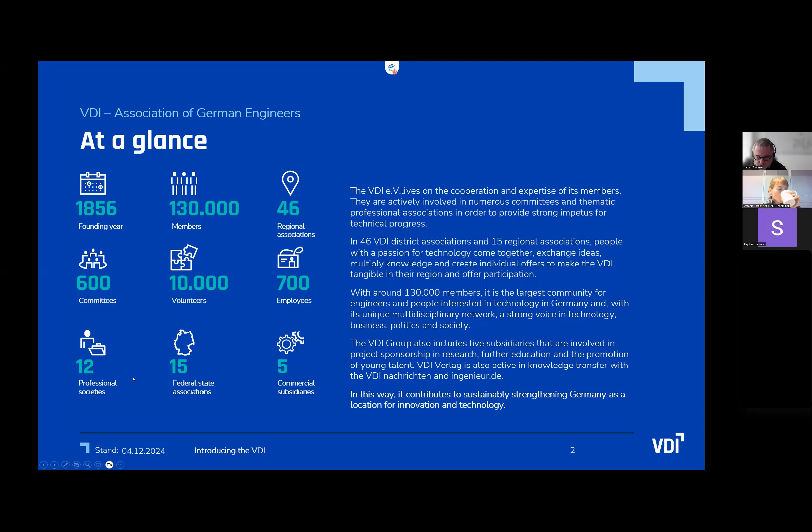First, I want to present some facts about the VDI. We were founded in 1856, have 130,000 members, and 10,000 volunteers work in our standardization committees. We have 600 committees, 12 professional societies, and 46 regional associations.

The main topic today is standardization, as the VDI sets technical standards. We have over 600 committees that develop recommendations for action and other publications such as studies. The main product is the VDI standards, with international recognition, and we also organize expert forums and workshops with our 10,000 voluntary experts. At the moment the VDI has 2,200 applicable standards.

Now I start with my main topic about the standard for thermal energy storage. The focus is on VDI 4657 Part 2, Planning and Integration of Energy Storage Systems in Building Energy Systems, covering thermal energy storage. The draft of the standard will be published in January 2025.

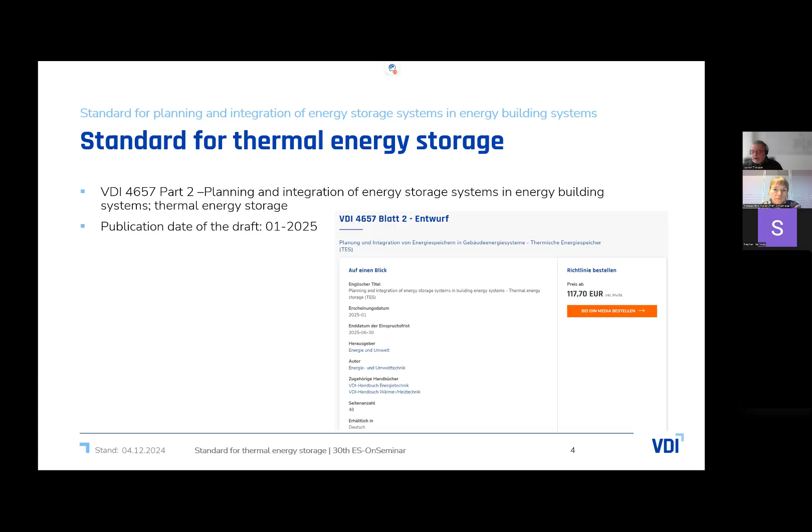But we already get the first questions about the standard before it is published. Therefore, I will explain the scope of the standard. It is intended as an aid for manufacturers and building services planners for the dimensioning of storage tanks for sensible and latent heat. In addition, the hydraulic system integration of thermal energy storage systems of different designs and usage requirements in buildings is described in the standard.

There are some typical applications. First, the storage of heating and cooling energy to decouple generation and demand, for bridging breaks in the supply or consumption of energy, and energy management when using several heat and cooling generators.

These are also elements of the future, very flexible requirements of energy systems, especially building energy systems. It shifts loads - hourly, daily, or seasonal loads - for energy management to increase the building's own use of electricity or for grid-reactive control. The last typical application is to reduce the cycle frequency and increase the running time during a cycle of heat and cooling generators in the case of only partial load.

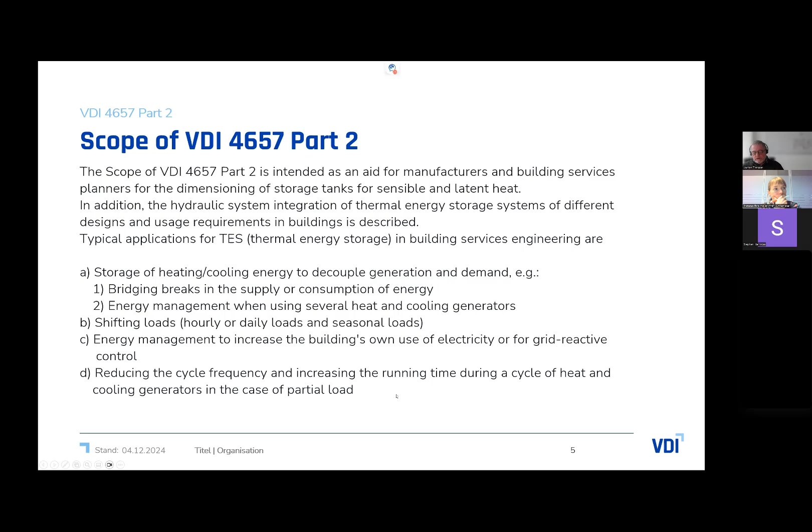We have a series of 4657 standards, and the thermal storage standard is Part 2. Part 1 is under development and we expect publication in 2026 - it's the basic standard about design and integration of energy storages in buildings.

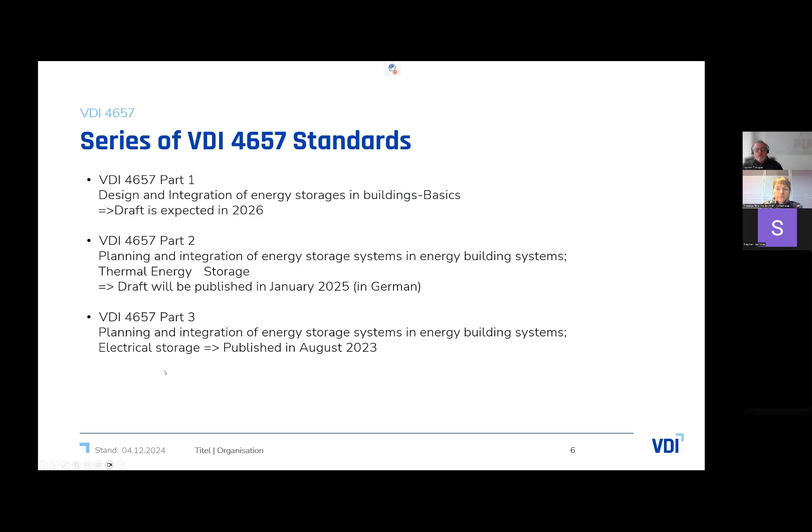Part 3 was published in August 2023, with the focus on electrical storage applications. But now we speak about thermal energy storage.

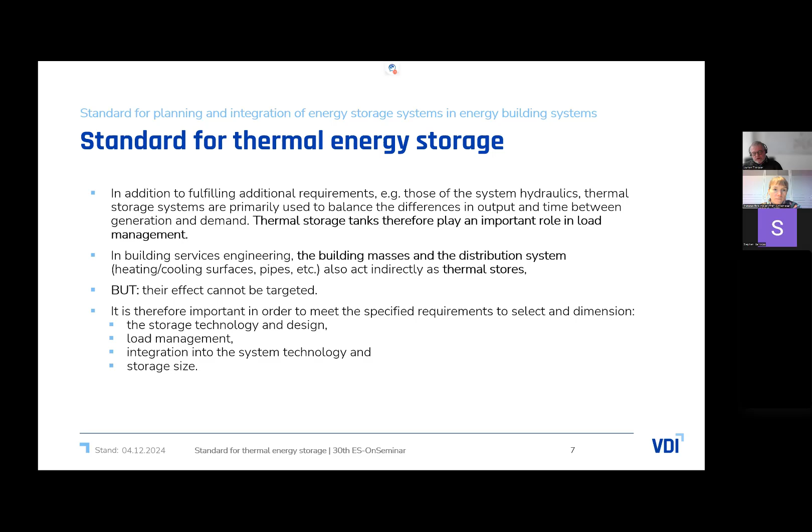Therefore it is important, in order to meet the specified requirements for selecting and dimensioning energy storage systems in a specific building, to choose the storage technology and design correctly, to organize the right load management, to integrate the system technology properly, and the storage size is also very important.

All these points were the motivation for developing VDI 4657, to describe the planning process so that selection and dimensioning of storage tanks for sensible and latent heat can be carried out. Heating and cooling applications were considered equally in this standard.

This means the selection logic moves away from liters of water content to kilowatt hours of heat content - the energy of the heat content, not the liters - because only the heat content is important when selecting a storage tank. In this way, storage tanks for sensible and latent heat can be selected equally, and the selection is determined by the boundary conditions of the application.

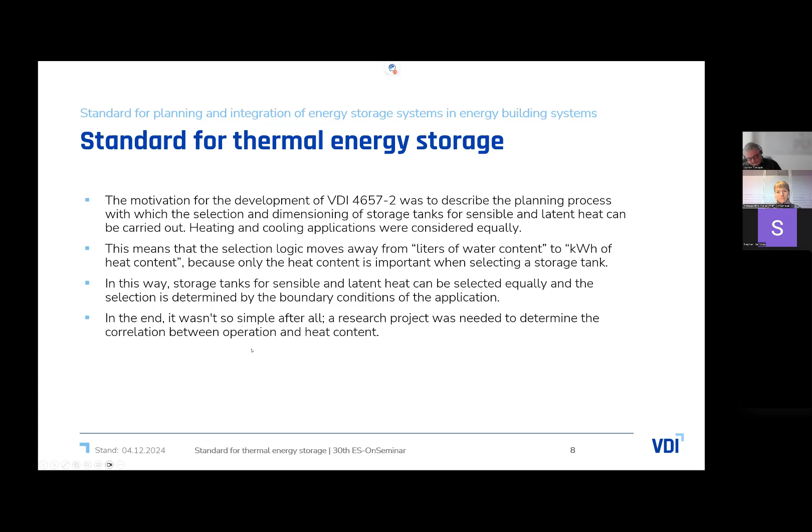In the end, it wasn't so simple after all. A research project was needed to determine the correlation between operation and heat content, and the main result of this research project was the standard VDI 4657 Part 2.

In the project, an easily determinable correlation was found between loading capacity, achievable or usable relative heat content, and the temperature difference at the producer or consumer. The procedure for planning and storage selection is described in this draft of the standard. The final result of the research project is the diagram shown on this slide, which shows the relationship mentioned for a storage tank under consideration.

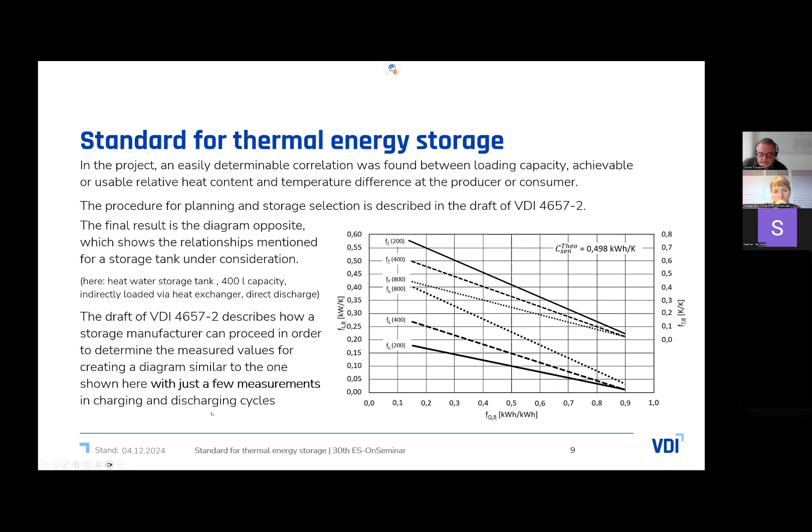Here's shown the diagram for a heat water storage tank of 400 liter capacity, indirectly loaded via heat exchanger and direct discharge. The VDI 4657 part 2 describes how a storage manufacturer can proceed in order to determine the measured values for creating a diagram similar to this one, with just a few measurements.

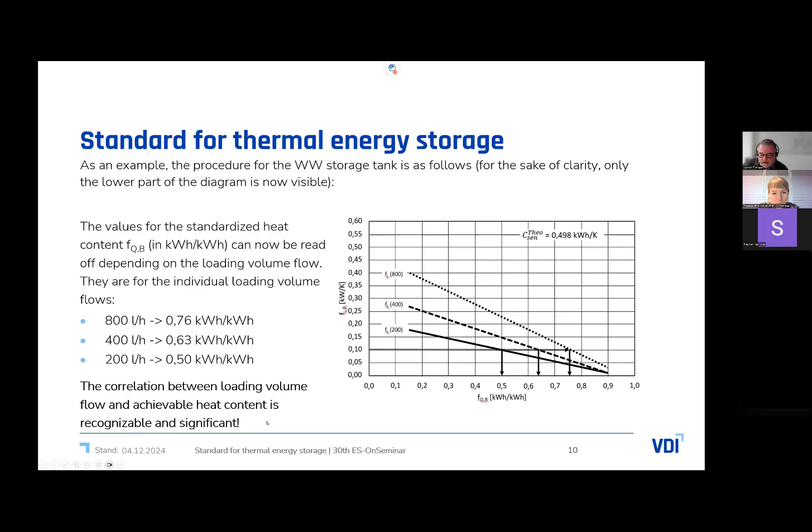Similarly, the upper part of a diagram can be used to determine the relationship between the temperature difference at the heat exchanger and the relative heat content. Depending on the loading volume flow, the values for the relative temperature difference at the heat exchanger can now be read off the standardized heat content. These are for the individual loading volume flows, and here is the relationship in Kelvin per Kelvin.

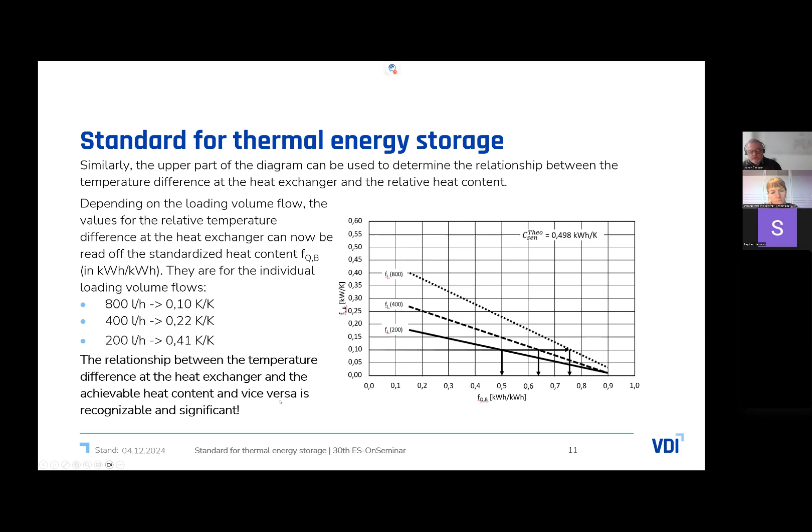The relationship between the temperature difference at the heat exchanger and the achievable heat content, and vice versa, is also recognizable and significant. And now I show my last slide.

It is planned a follow-up project where the applicability and scalability, among other things, will be investigated in collaboration with storage manufacturers, and we plan to bring these results to the 3850 part 20 technical standard, which has long been established.

In which the product data for software programs is described as machine readable. And the embedding of the findings from the research project in 4657 part 2 must be driven forward so that the procedure described is incorporated into the planning process.

And of course, we also plan that this includes the usability in electronic data exchange and for comparison in building information modeling.

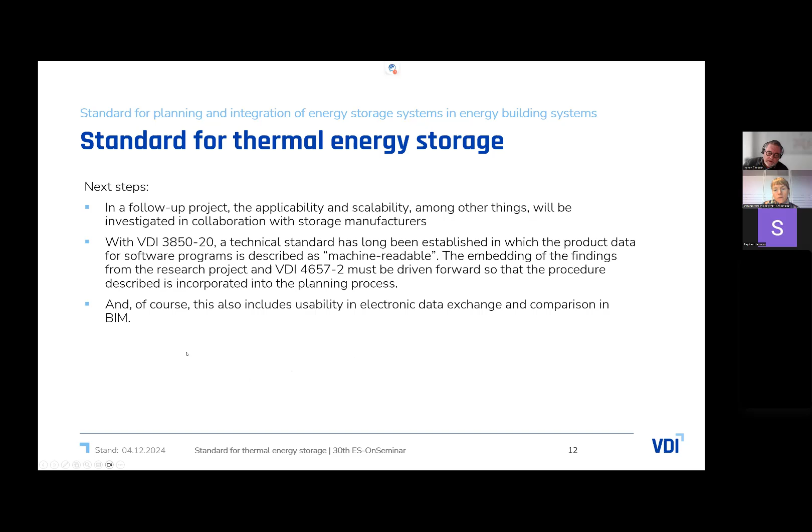I hope you understood the results of this research project, and the results concerning the draft standard we will publish in 25. Thank you very much.

Okay, thank you very much. So I think you gave a good overview of what happened, and especially what are the results. I know that a lot of work went into getting there. So also we'll see that AE was involved. Yeah, so it was a lot of work there.

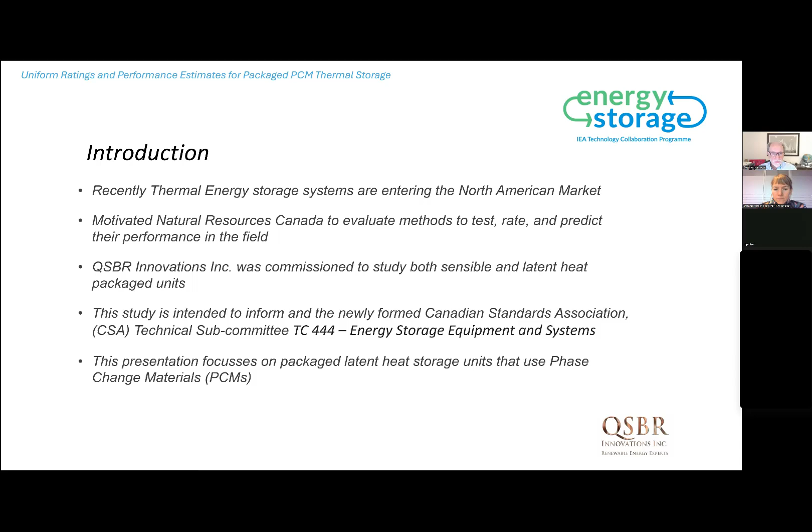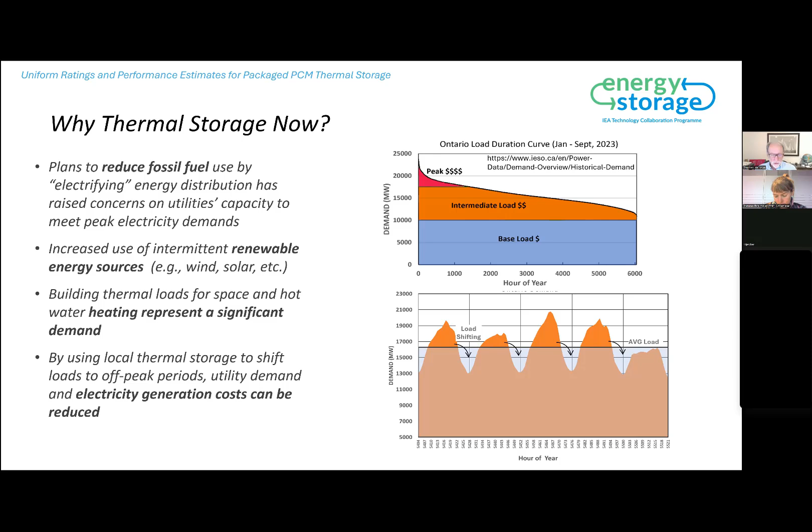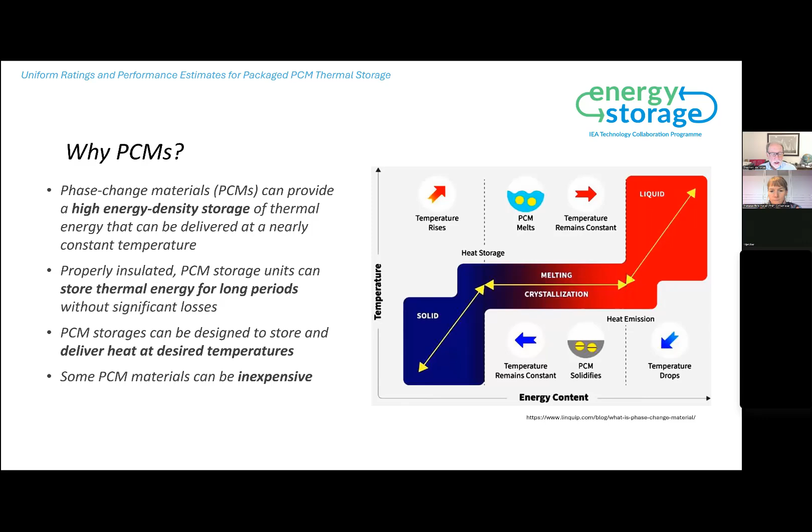So why PCMs? The advantage of phase change materials is that they offer high energy density storage. When properly - or well - insulated, they can store thermal energy for reasonably long periods. You can also tune PCMs to deliver heat at a desired temperature, and some PCM materials can be inexpensive.

So what are the challenges with PCM storages? What are we trying to achieve? They've got to operate reliably. There has to be efficient methods to add and remove heat from the storage - effective heat exchangers. We know that certain PCMs undergo a volume change with temperature, and this can compromise heat transfer. A term called phase segregation can occur in certain cases, where the different components of a PCM separate over time, affecting performance.

And a key point and the focus of this talk is that assembled PCM storage units will likely not perform directly as would a small sample of a PCM material.

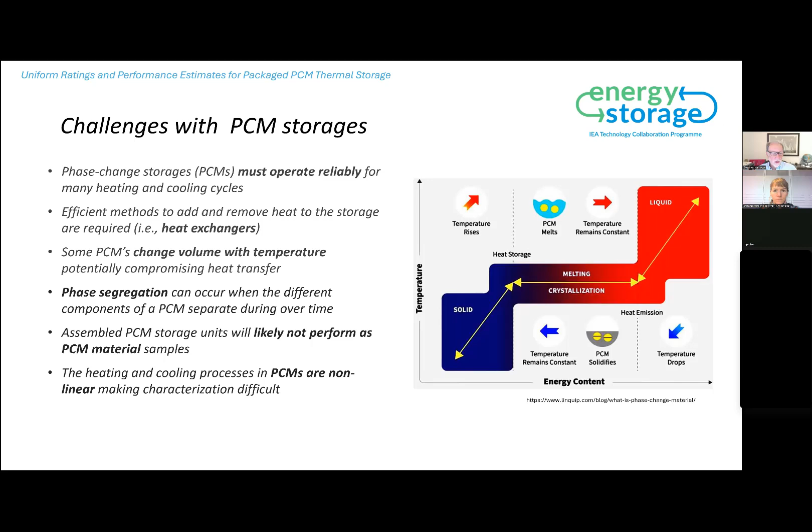The challenge for us in trying to characterize the performance and operation of a phase change material during heating is that the process is highly nonlinear, as shown in this diagram. Phase change materials, as we all know, go from a solid to a melting process and then to a liquid state.

So the objectives of this study are to identify standard test methods and equipment that can be used to experimentally evaluate packaged PCM storage units, and to arrive at methodologies for rating the thermal performance, including things like thermal capacity, charge and discharge rates, standby losses, round trip efficiency, etc.

We also want to evaluate the suitability of the proposed test methods by doing actual tests on commercially available storage units. Hopefully from this we can develop a uniform performance characteristic or equation, where the coefficients from the test can be used to determine the performance.

This is executed by using what we call a black box testing method, where all the measurements are conducted outside of the storage unit itself.

Finally, we want to develop this generalized model of phase change thermal storage so it can be implemented in various system simulation programs, most notably TRNSYS, which is used in North America.

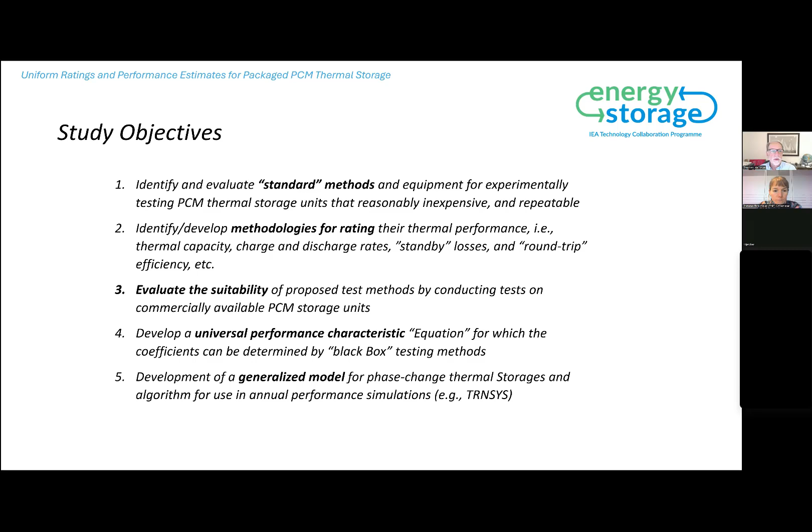That raw data can then go into the product ratings, things like capacity during charge and discharge, round trip efficiency, etc.

But that raw data can also be used in a regression analysis. If we have a generic performance equation, then during the regression analysis we can derive coefficients which describe the heating and cooling process and the capacity of the thermal storage.

Now, if we use that generic performance equation, we can also implement it in a simulation program, which allows us to use site-specific load data to predict how systems would perform under different loads and scenarios. The challenge then really comes down to: can you come up with a generic performance equation which is flexible and suitable for this application?

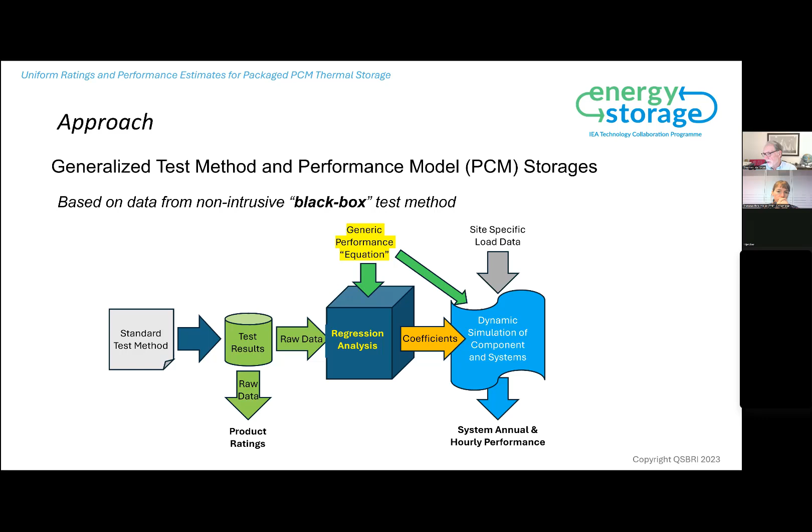So this is the testing portion. We decided to use an existing standard published by ASHRAE, titled Method of Testing Active Latent Heat Storage Devices Based on Thermal Performance.

It's a non-intrusive black box test, and this standard was actually withdrawn a number of years ago, but there's a lot of interest in re-implementing this standard, and there's a series of standards related to this.

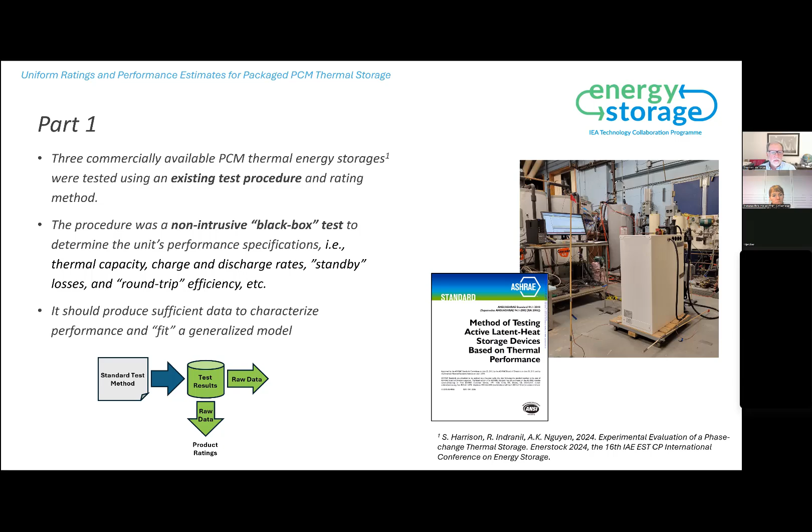We conducted testing on a number of PCM storage systems commercially available to this standard to obtain data, and that's shown here, the type of scenario.

So we have the sample. We measure the inlet fluid temperature, the mass flow rate going into the storage, and we record the outlet temperature. The diagram at the bottom, which is a little unclear, is actually directly out of the standard.

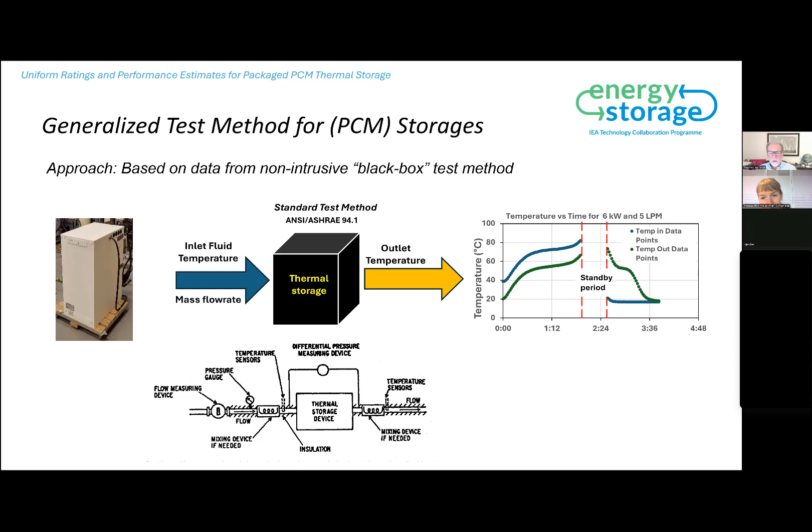And the type of data you get out is shown on the right-hand side during a charging phase—or actually the left-hand side of the graph is the charging phase, the right-hand side is the discharging, and there's a standby period in between to determine the rate of heat loss from the storage.

These are what actual test results look like, and there are a number of lines on this curve. The most notable ones, on the left-hand side, are the green and orange lines, which represent the inlet and outlet temperatures during the charge process, using the left-hand axis.

On the discharge, you can see the orange horizontal line, which is the inlet temperature, and the gray line, which is the outlet temperature, which drops—and you can see the phase change portion of the curve. As the discharge continues, the inlet and outlet temperatures coincide.

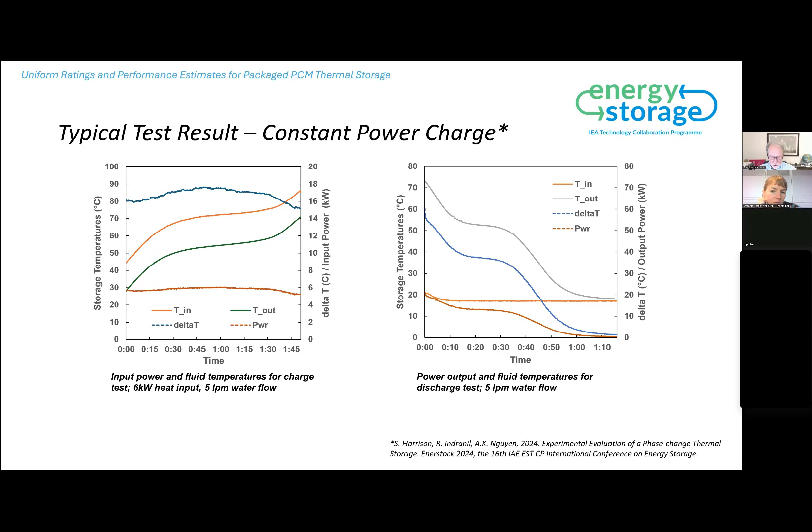So in developing the performance equation, we looked at a number of other types of developments, and we gained some inspiration from what's used to characterize solar thermal collectors.

For those of you familiar with the so-called Hottel-Whillier-Bliss equation, shown below: what you have is an equation which allows you to determine the outlet power from a solar collector as a function of a number of terms representing the optical performance and the heat loss coefficient.

And there is a factor, FR or F prime, depending on whether you're using inlet or mean fluid temperature, which relates to the heat removal factor from the collector, which is a function of the flow rate. And that is integrated to determine the energy produced from the collector.

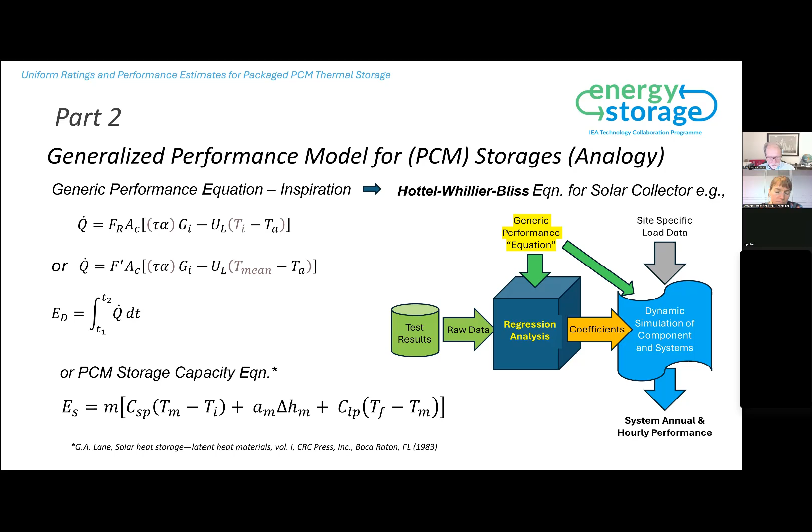So there is a PCM storage equation that was put forward by Lane, which really covers the sensible heating portions and the latent heat portions of the process.

Actual test data is shown here on the left-hand side. This is the energy stored versus the temperature during a charge process. And what you see is the inlet temperature and the outlet temperature and the mean temperature, the average of those, on the left-hand side.

Now, what we wanted to do was try to develop a universal characteristic to minimize the amount of testing required. And so we conducted various tests, in this case charge tests, using different power inputs. So you see what's shown are tests at 6 kilowatts of power input to the storage and at different liquid flow rates flowing through the unit.

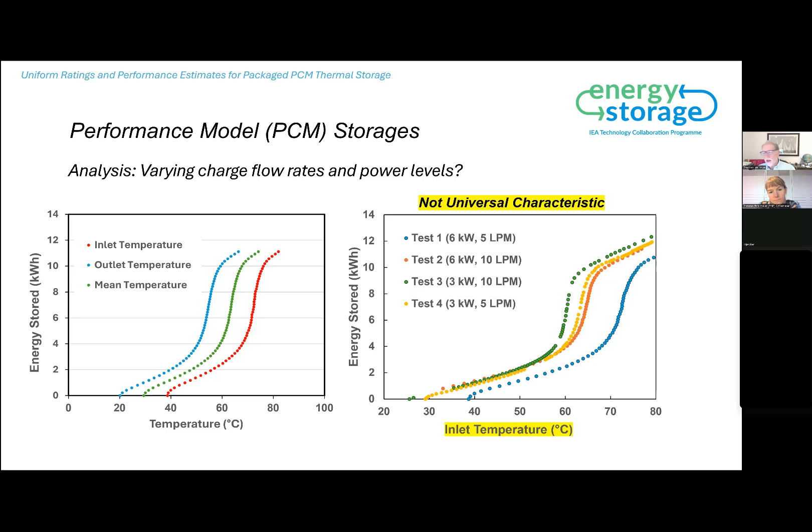And what we see is that if we plot this against the inlet temperature of the fluid, we get a series of curves. Each curve is unique and they don't collapse. So looking at this is not a universal characteristic, and so we wanted to see if we could go further with that.

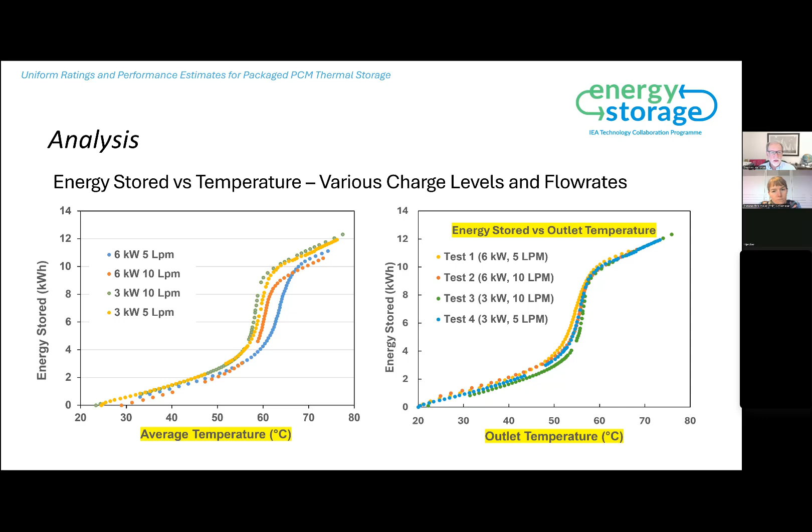And if we look at this, although things collapse very nicely, this curve is based on outlet temperature. And in a simulation modeling process, you are most likely going to know what the inlet temperature is to the thermal storage and the power level and the temperature of the fluid. So it's less functional if you plot this against outlet temperature.

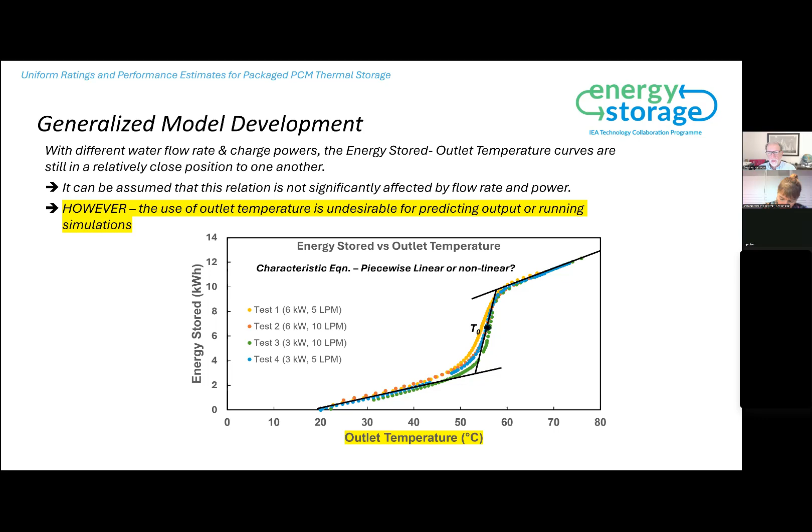And we have an algorithm that we can derive back the inlet temperature, but it's certainly not as convenient. So we look to other possibilities. And one of them, once again, was to plot it against the inlet temperature, as I showed.

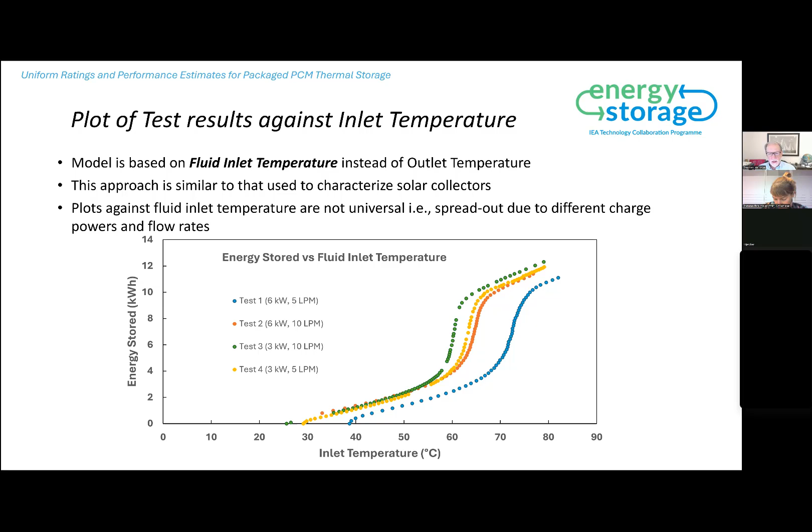That wasn't too encouraging. So what we did is we looked at introducing a flow factor similar to that FR value, which I mentioned with regard to solar collectors. And instead of using inlet or outlet temperature or mean temperature, we introduced the term T star, which is an effective temperature for the storage.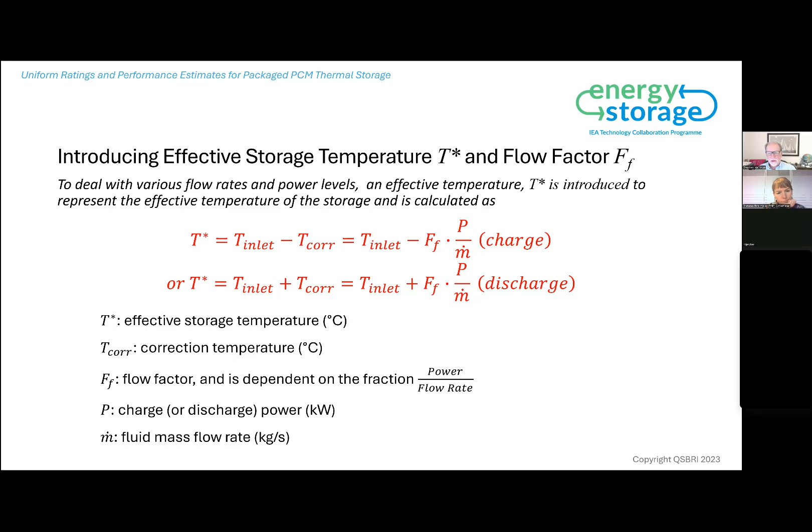And you can derive this from these relationships shown here during the charge and discharge processes. And the points of interest is this F sub F, which is the so-called flow factor, which allows us to collapse the data.

Now, from the test data, you can arrive at this correction temperature versus the power level divided by the flow rate. And when we do that, we see that in these cases, we get an effectively linear relationship. And the slope of that curve is the flow factor as shown here. So those are two different cases shown in those graphs.

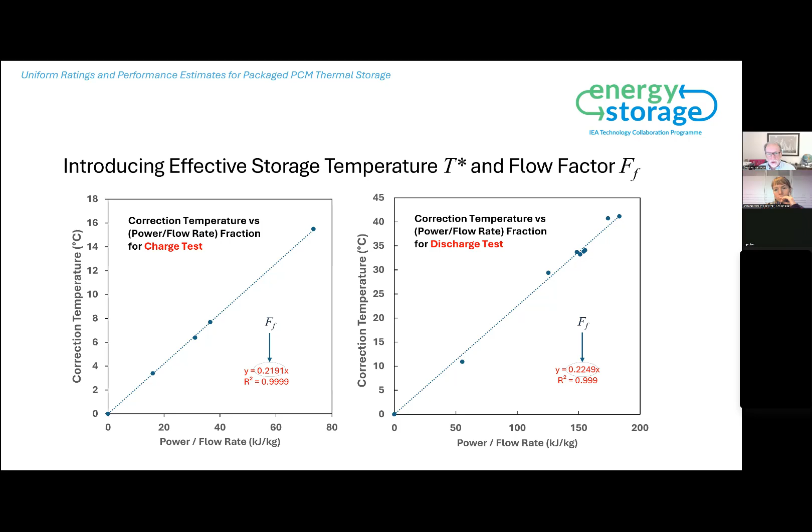So when we apply this and we plot this against this corrected effective temperature, you can see that we're back to a case where we've been able to collapse the performance on a unique performance characteristic.

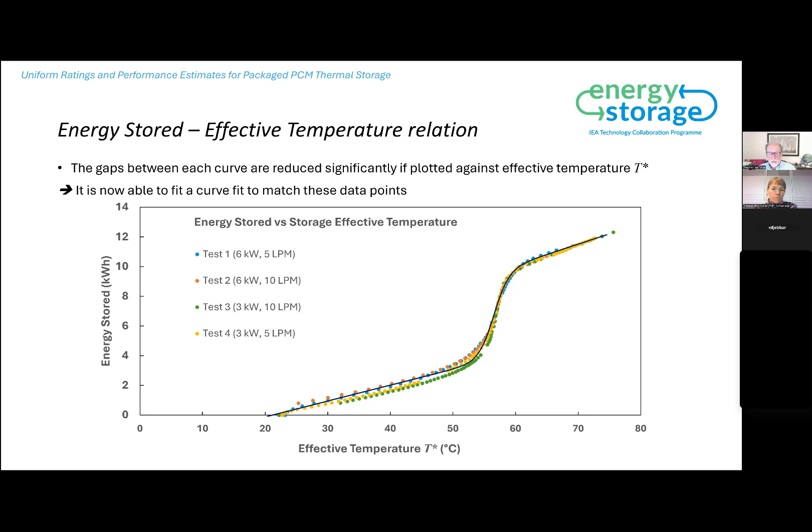Now, the challenge then is, how do we come up with a relationship which represents that very nonlinear expression? This looks a little complicated, and I have to give credit to my co-authors who worked on this. In effect, what we have is three segments: one which represents the sensible heat portion on the left-hand side, then the portion where you have the phase change in the center, and then the liquid phase, which is on the far right.

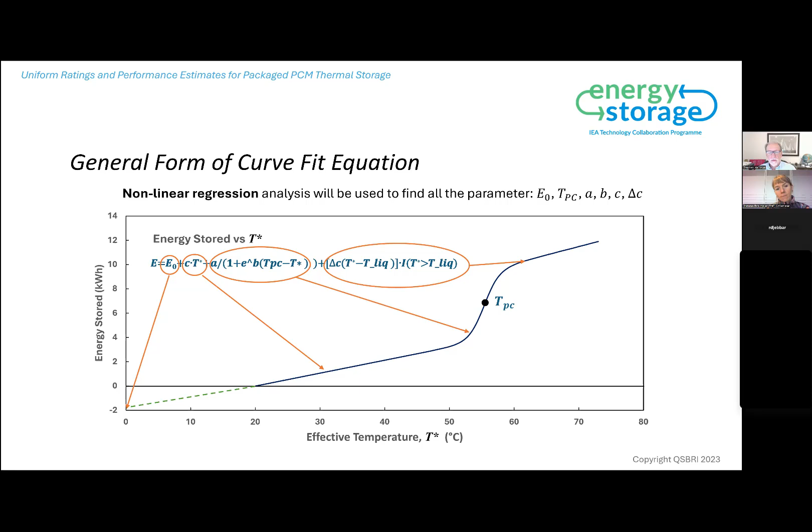So this equation has a number of terms in it. In actual fact, it has, as we're seeing there, 6 terms, which have to be derived from the test results. And so how do we do that? Well, I'll get to that in a second.

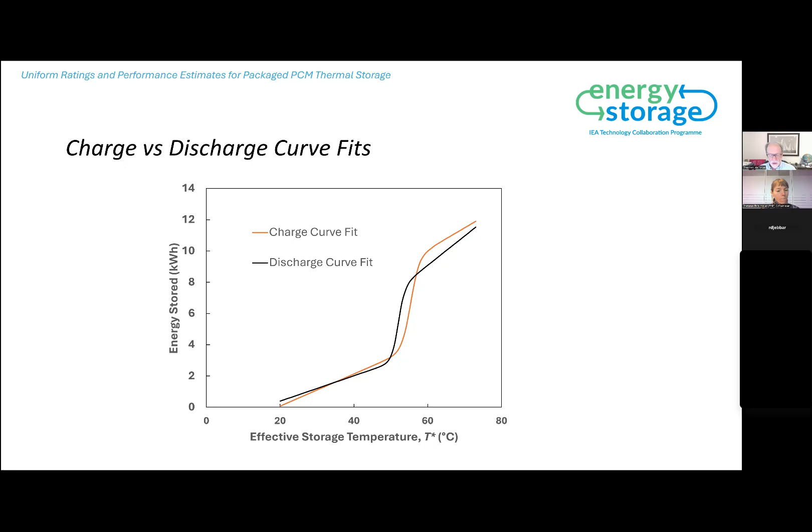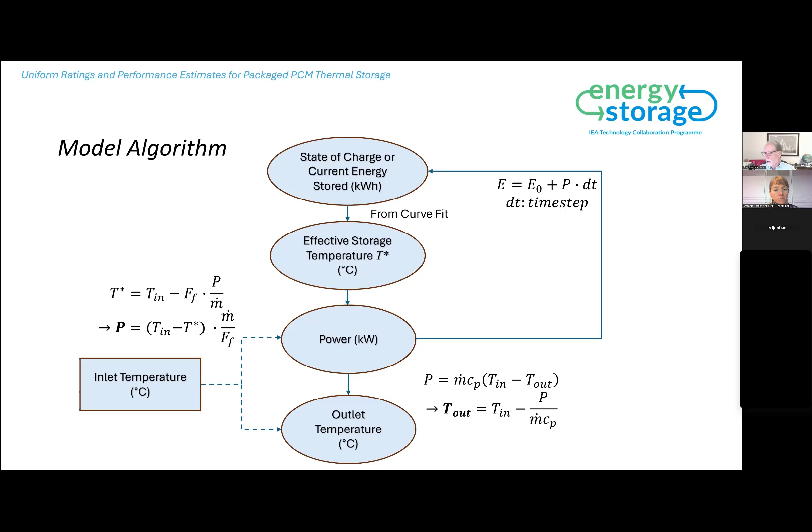In effect, if we do fit the data, we see that we get slightly different curves for charge and discharge, as you would expect, because the heat transfer processes are operating in opposite directions. So this is the algorithm that we use. It's quite simple and quite straightforward to allow us to determine the state of charge. And in the sake of time, I'll move on.

So this is very encouraging. And that was a charge, and this is a discharge test. And once again, the data looks very close.

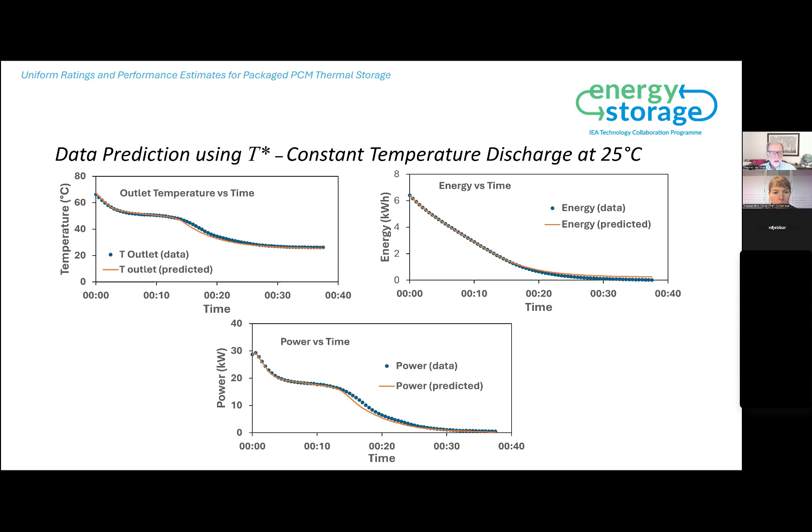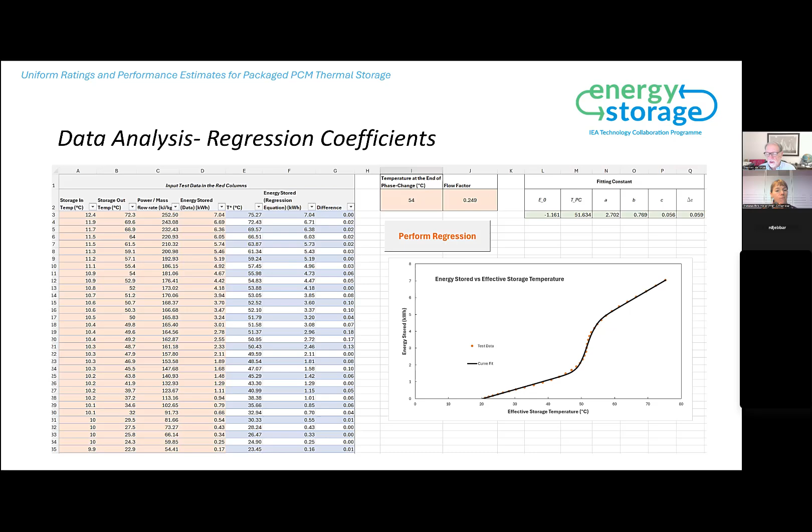So what we've done is that we've created a template within Microsoft Excel, which allows you to input your test data, and using the analysis package which exists in Microsoft Excel, you can perform a regression, and it will produce the coefficients that you need for the curve fit, including the flow factor and these various terms which form the equation. And what you can see on the graph below is the data that is the curve fit to the experimental data, and you can see that the results look quite good.

Now, what we've also done is, moving forward, we've looked at trying to implement this relationship using the regression analysis and that generic performance equation during the test and the analysis of the results. Once again, we derive these coefficients. Within the simulation program is a component, or in relation to TRNSYS, it's referred to as a type.

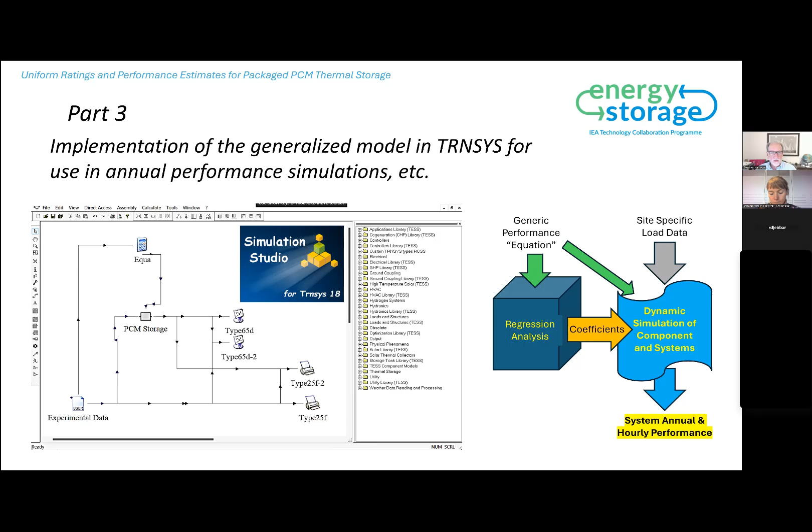And so what we have is a component which represents a PCM storage. It contains the generic performance equation, which I've previously gone into. And with the derived coefficients for the particular product, we are able to use those in the simulation and produce the results. And this is just an example of that TRNSYS type.

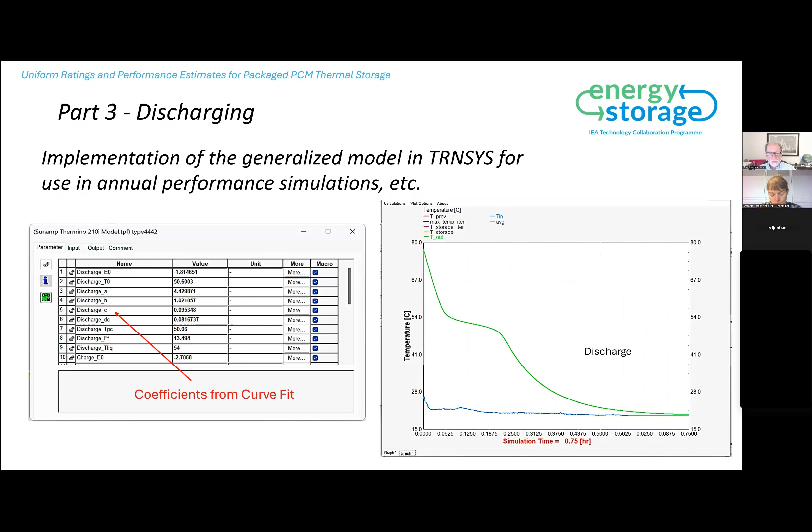Okay, so just for fun, we decided to put in water to see what the equation would do. And certainly water is not a phase change material at the temperature we were looking at. And we were very pleased to see that the correlation equation came out linear and that the results are consistent with what we would expect.

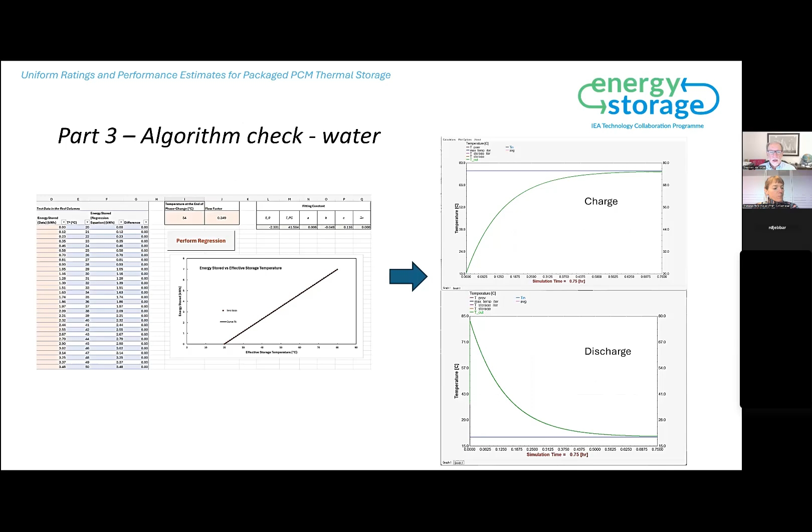Okay, so in conclusion, what we've shown is that it's possible to characterize a PCM storage, and we can do that from a non-intrusive black box test where we don't have to go into the storage, which is important as many manufacturers of products don't want to divulge the characteristics of their specific PCM or tell you about the details of their heat transfer components.

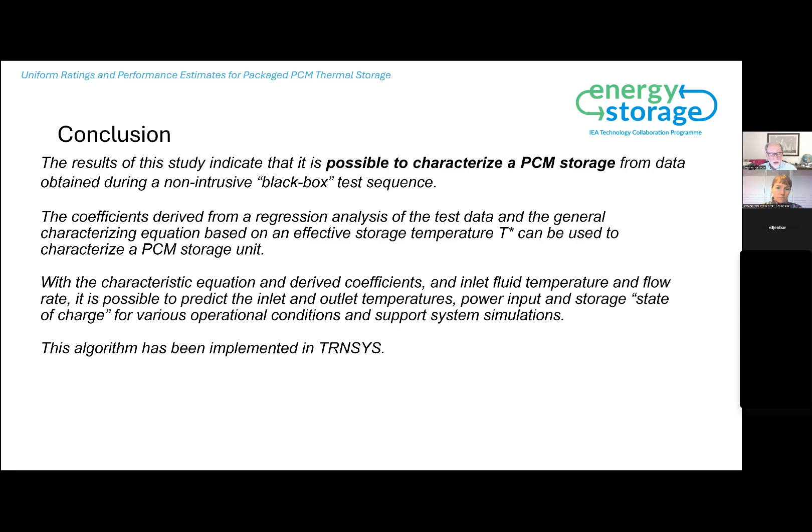What we can do is that we've been able to use this effective storage temperature to allow us to collapse various performance conditions onto a single characteristic. And we've been able to implement that into a typical design simulation program, in this case, the TRNSYS routine.

So we still have work to do before this really goes into use, and that is we need to test other PCM formulations. We must do more testing and analysis on different storage sizes and storages with different design features. And ultimately, we need field data to compare with the simulation results as well.

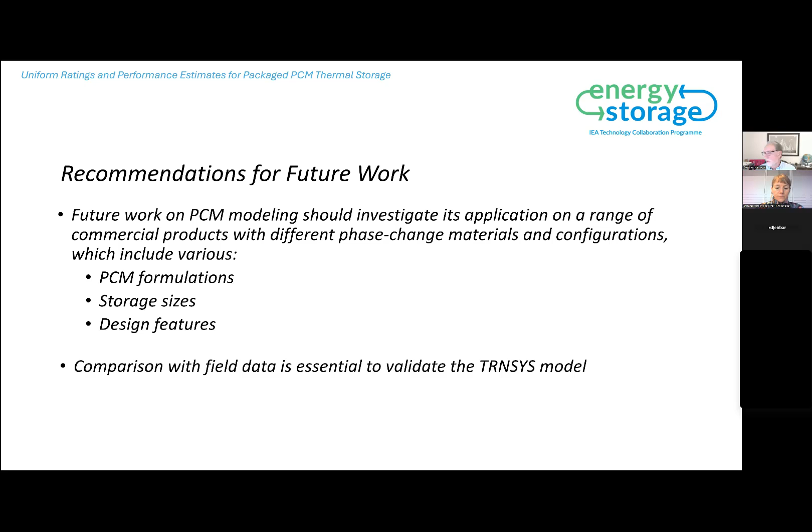So thank you for your attention, and any questions, I'm happy to give you my best attempt to answer them. So thank you, I'll stop there.

Thank you very much. Thanks. It's a very, very nice approach, I think. I would have a couple of questions, but I, of course, let the audience go first.

So we have at least one question in the chat, which is also from Geoffrey. It says: is the TRNSYS model, respectively the type, available? If yes, is it open source? And where can it be found?

Okay, so the TRNSYS type is in testing right now. It is a deliverable to Natural Resources Canada, and they will be doing a series of evaluations and checks on it.

And in effect, it's up to Natural Resources Canada when they feel it's appropriate to release this TRNSYS type. It will hopefully go into the standard grouping of TRNSYS types, which is available through TRNSYS or more than likely available through Natural Resources Canada. So yes, that's our status. This information will be fed to the CSA Standards Committee, and they will deliberate on the processes which we have put forward. So I hope that answers that question as well.